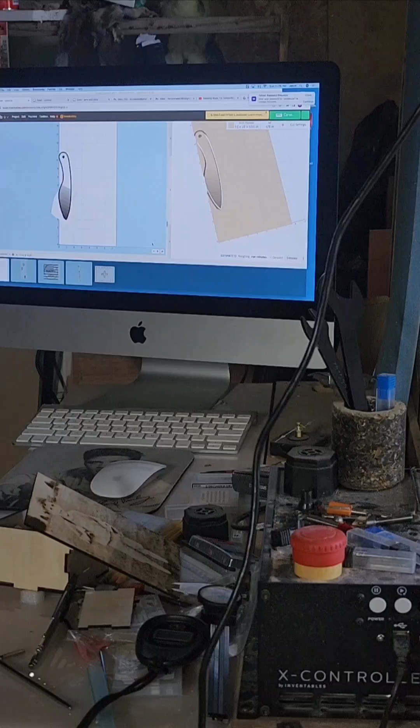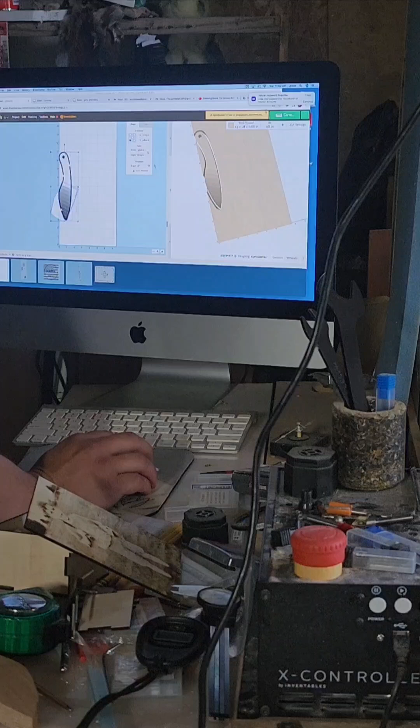So I got my knife. Measure that. It's going to be 8 inches. Where's my tape measure? My longer one. It's gonna be closer to 9. How about this one? It's gonna be under 8. Okay. I'll make this one a little bit bigger. I'm gonna lock that in. Make sure we can see what's going on. Zoom in a little bit more. Probably fine. My height, which is length, I'm going to give that 9 inches.

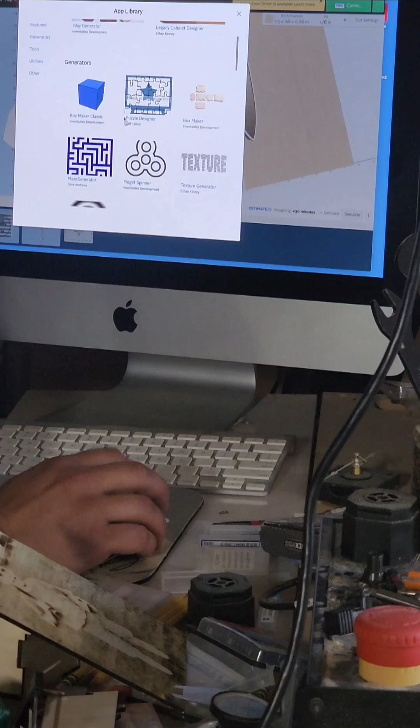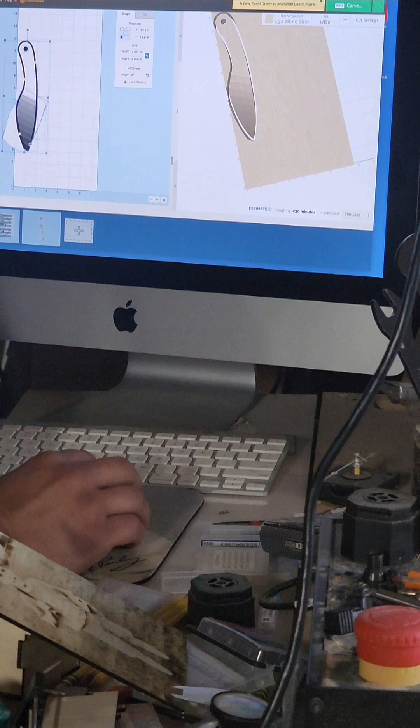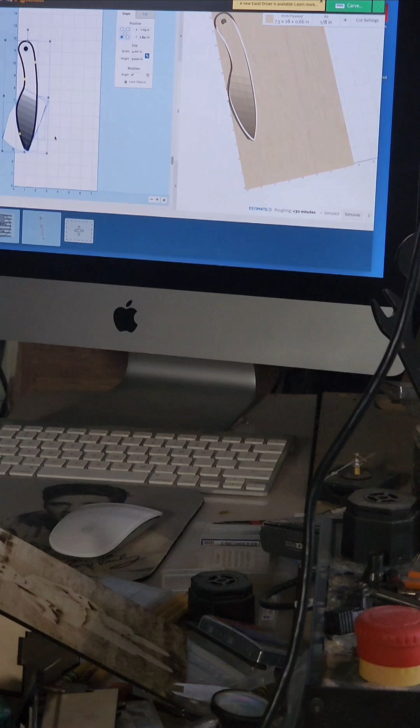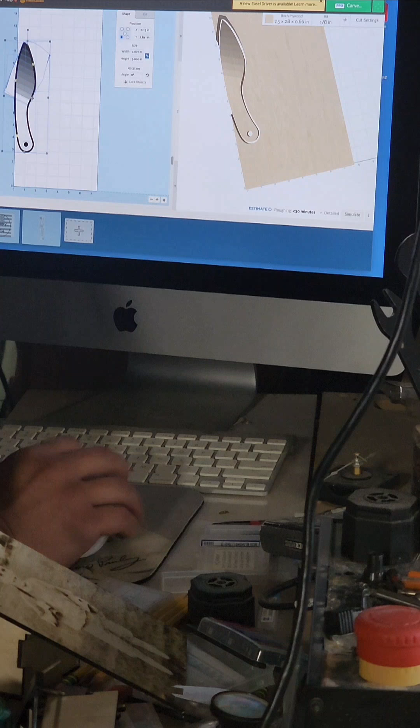So what I'm going to do is highlight. I'm going to place this knife back in my setup. I said that was 3.5. I'm going to edit, flip it vertically, and then edit, flip it horizontally. I'm going to come over to my location position. I'm going to type in 3, tab down, I'll go like 0.25, and that is going to be the location where it's going to cut on the board. Now I do got some defects in the board, so I need to make sure that it's where I need it. That's why I measured it.

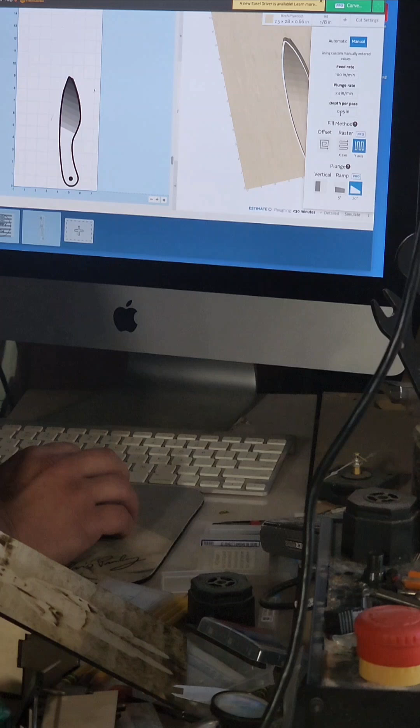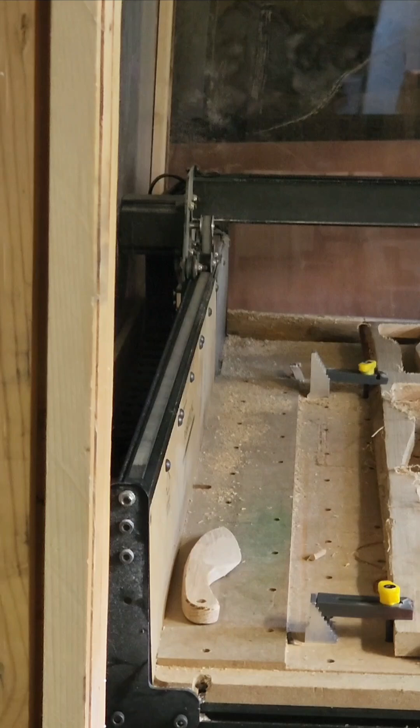Over here it gives me a rough time of 30 minutes, which I don't believe it's going to be like that. Feed of 100, plunge rate of 24, depth per pass is 0.05. I'll give that the okay. Now what I'm going to do is come on over here and back this stuff up. Get these out of the way. Slide those out of the way.

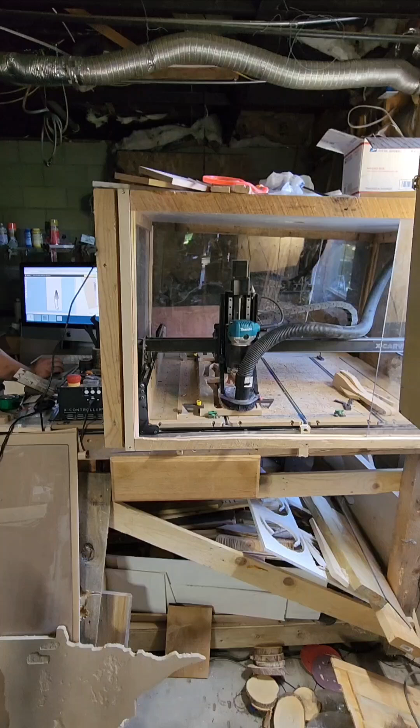What I'm going to do is home the machine. Also going to make sure that before I home the machine, right there. Why I did that is because when it comes on in, it's gonna go over here and hit that clamp. So I'm gonna come on in, take this hose off, I'm gonna raise that up. I'm gonna jog him back over. Jog him over just a little bit more. That way I can position this just above the clamp.

That way when it makes a turn, because it's going to come down here, it makes a turn, I can look at it with confidence and say, okay, we're good, we should be in the clear. What I'm going to do now is the same thing for this side over here, because this is the only clamp, I don't have one back there. So I'm going to do the same thing right here.

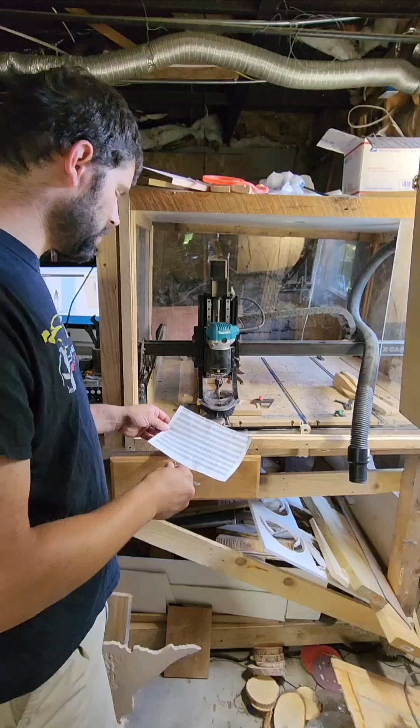I also, back in time, made this cheat sheet. I went online, I found the RPM specs for this router, and at number 1, it's putting out about 10,000 RPM. At speed number 6, it's putting out about 30,000 RPM. So I just went 1, 2, 3, 4, 5, 6, and did the math about what each one is going to be. If I want 1 thou chip load, it's basically a 2 flute, so you'd have to calculate based off anything else. But I think for wood, it's good to run a 2 flute. I do have some 4 flute end mills, so that's going to be a little bit different. But yeah, I think that's a good cheat sheet.

So if I run at a number 4, I'm going to be running at 22,000 RPM, and at 100 inches a minute. If I was running at 132 inches a minute, I'd be pushing a 3 thou chip load. But I'm not. I'm going to be running just under that, so it's going to be between 2 and 3, like 2.5. So that's okay. Plus a 50 thou depth. If I go any deeper than 50 thou in this harder oak wood, it's going to be a lot of pressure. And once it gets down to the bottom, which on this side of the board, because the board's got a taper, is about 660 thou thick with a caliper,

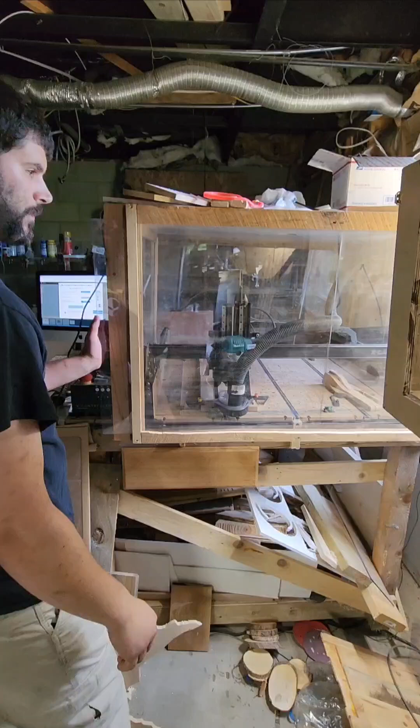Slide my doors in. Turn that on. Plug my vacuum in. Spin those on. Carve it away. This says 14 minutes. We'll see how this all works out after 14 minutes.

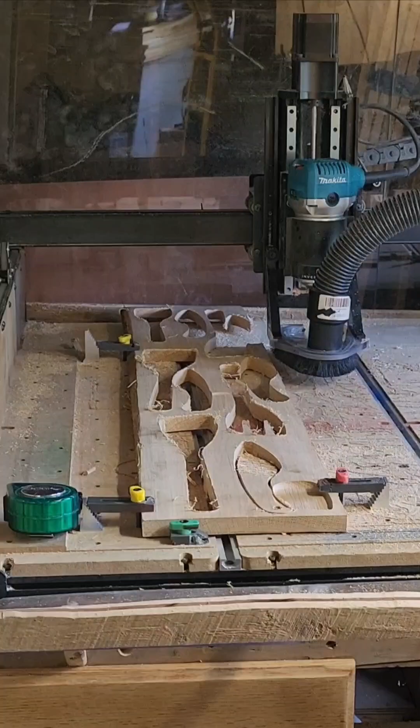Alright, so it's done. That was a bummer, actually. I'll explain why here. Let me get the thing out of the way. Alright, so this is kind of a bummer, but it is what it is. So what happened? My 3.5 inches, 3 inches. Okay. Maybe I should have went 3. So I had a little pocket right here. Let me see about the camera. You know what?

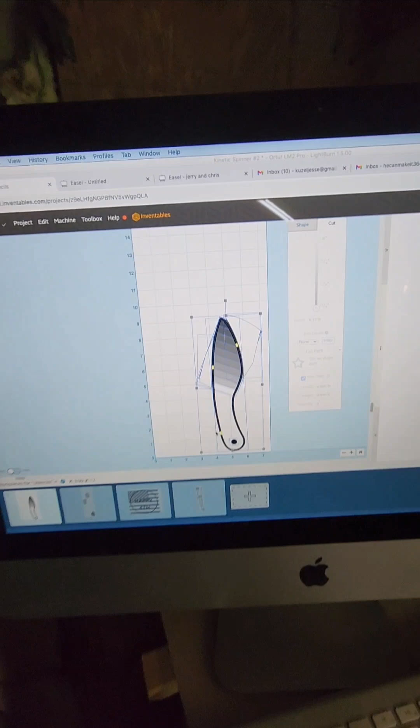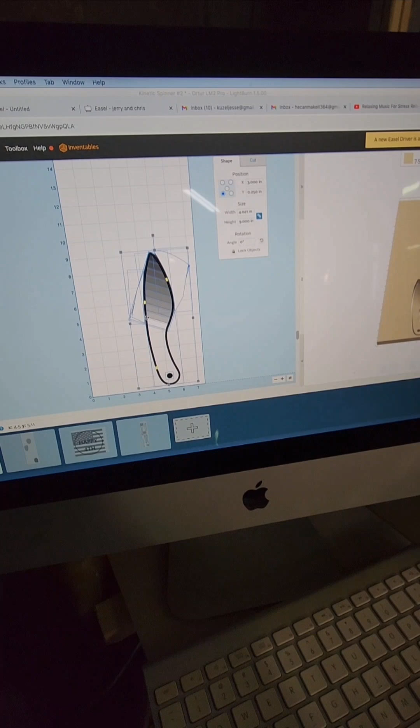I should have actually just took that and bumped that back a little bit. What I should have done was my 3-inch down in here. I should have just used that line as a reference, instead of using my coordinate up here. All would have came out well. But because I didn't, this is what happened. Now, my tabs were not quite enough. Why were they not quite enough? Because I had a little bit of a gap under here. Just a little bit. So there's tabs, but they weren't big enough to really do much.